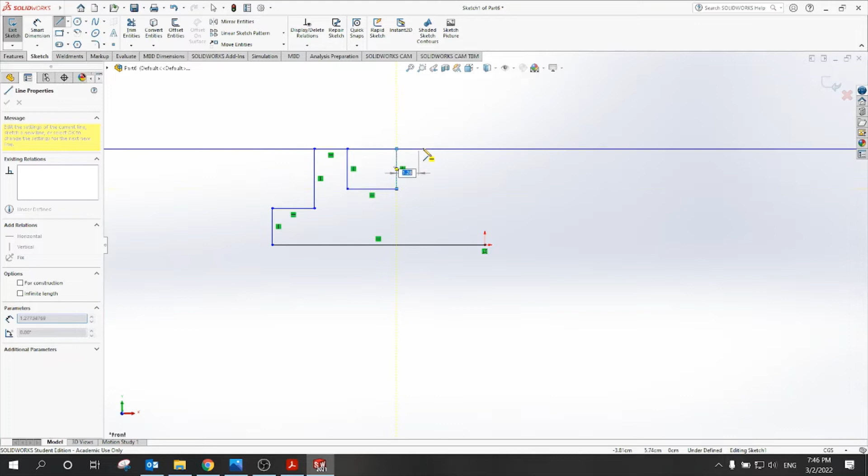a new sketch, front plane, and straight line from this corner to the end, and then small line, and then that 25, and then the height, and something like this, and then I go down, and then the random frame, and then I'll stop at the origin.

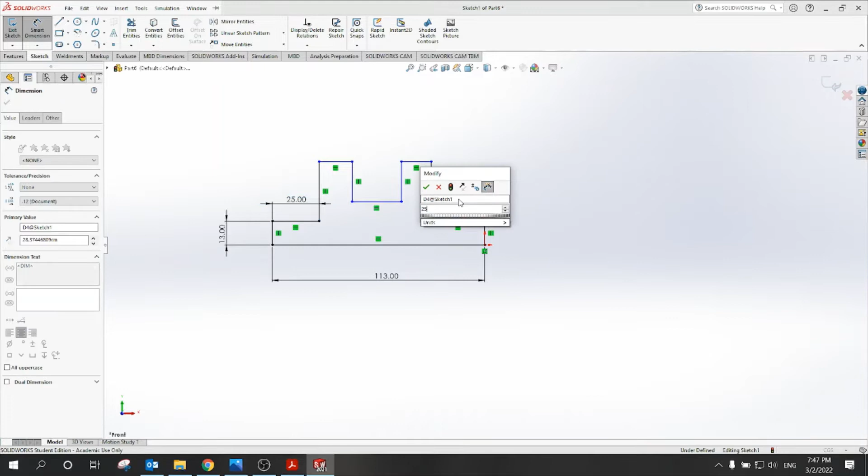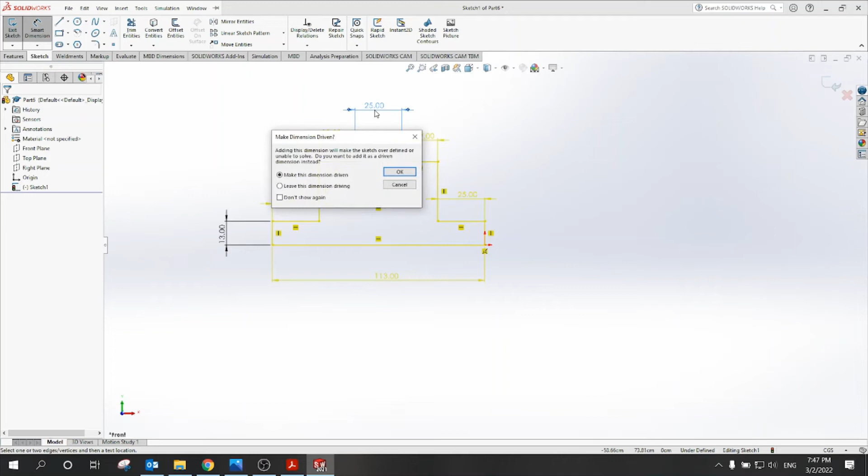When it comes to dimensions, I have to put this line as 113 and this height as 13, and this is 25, that's also 25, and this is 19, and this is also 19. The gap in between is 25. So it's given. Why? Because 113 minus 25, 25, 19, 19, so automatically it's 25.

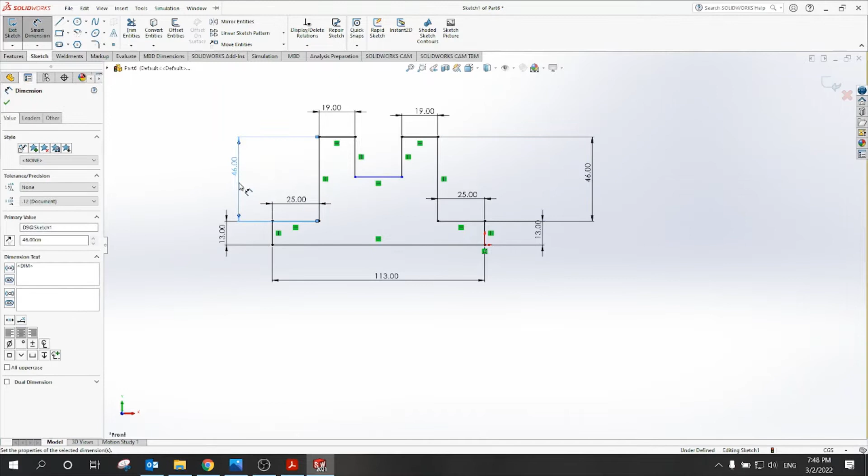Now this height is 13, and also the other height to the right is 13. And we said that the total length now is 46 to the center of the circle. So this is also 46. Now I finally need to define this height, which is the thickness 13, and I have this box, height is 17, and it's 35, starting from 39 from right.

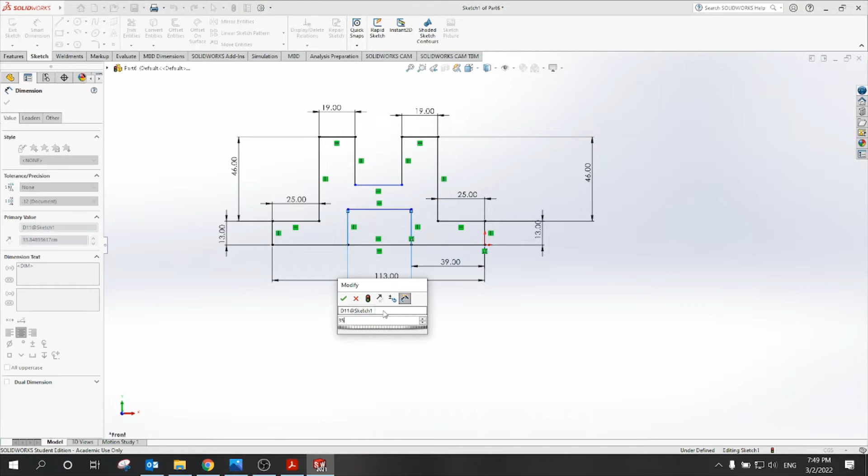So that box is somewhere in here, it has a distance from this line to the right edge 39, and the width is 35 and height is 17. So this is 35 and this is 17. Now the height of this line is given to be 13. Enter. So this is the final sketch, fully defined.

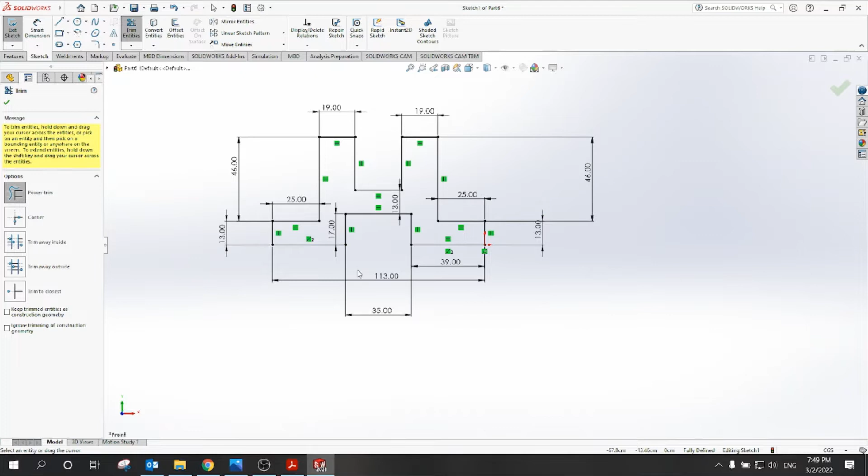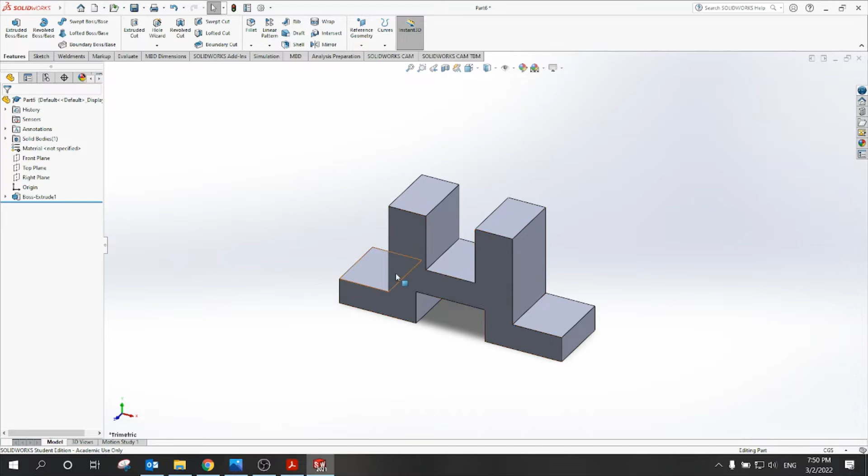I just need to trim this line. And that's it. So if I finish the sketch and extrude a distance of 32, I'll get this shape. This is my view. Now I only need to add the details of the circles, for example, and the chamfer and the small circles. If I start with the small circles on this top surface, so I have a circle, this distance is 13, and this distance is also 13, and the diameter of the circle is 11.

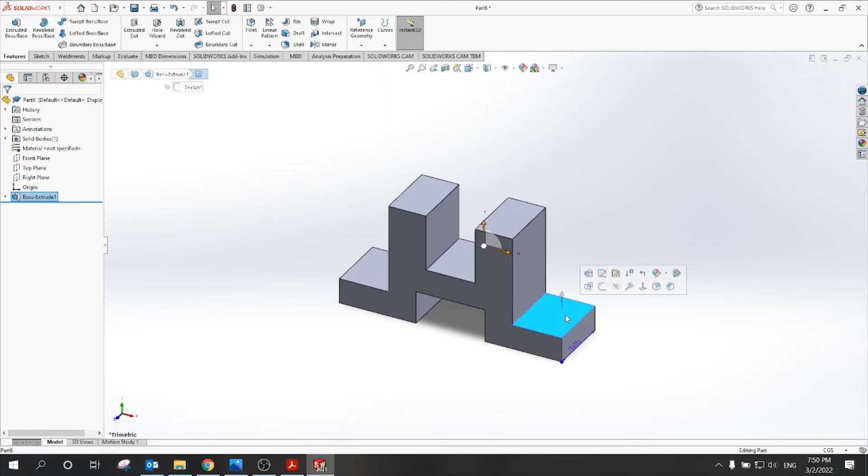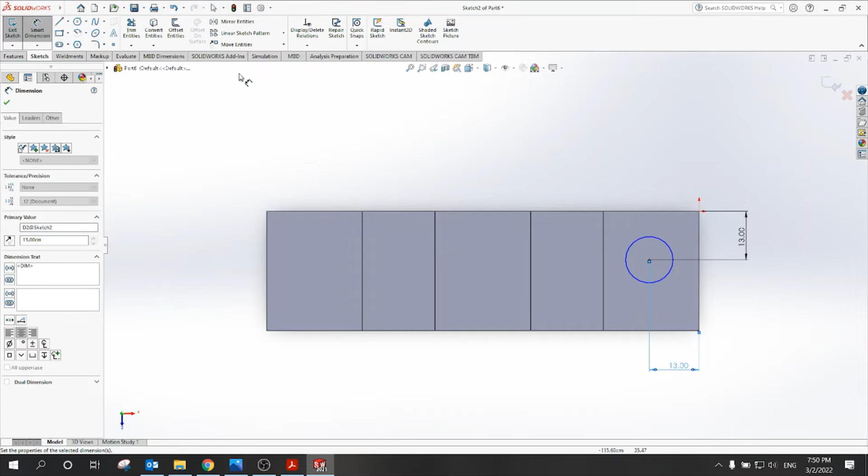So this is the top view, normal to, and I'll create a sketch, and I have a circle. It says distance from this line to the circle is 13, and from this center to this line is also 13 with a diameter of 11. And I have another circle in the other direction. The diameter of the circle is 11, and the distance from this line is 13, and distance from this line is also 13.

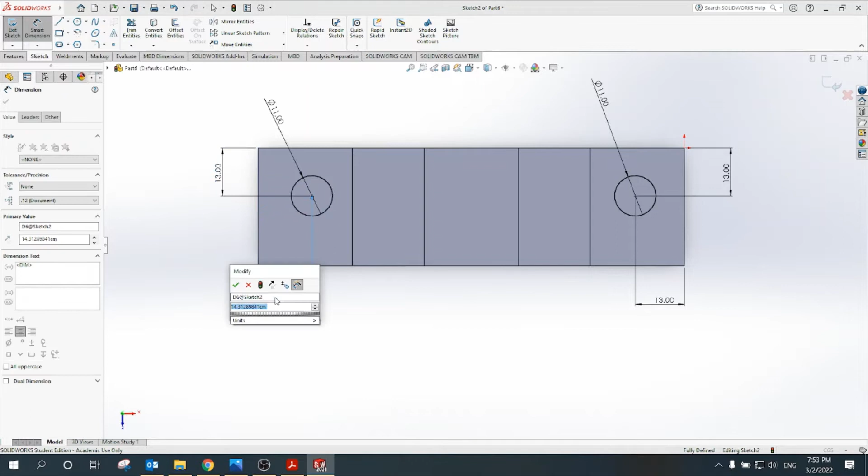Now if I confirm the sketch, I extrude cut circle 1 and also circle 2, then I'll get this shape.

In this tutorial we want to practice something new, so I want to cut this chamfer without drawing a rectangle and extrude cut. The ordinary way is to go to this plane and make a sketch, make a triangle, and then cut out.

Today we'll just go to the tool named 3D fillet or 3D chamfer, same as fillet or chamfer in 2D but in 3D. So when I select, I have all the options to cut: two distances, similar distances, angle and distance, inclined distance, and so on.

So I'm saying that I'll give you a distance and angle. This is my option, because I have angle 45 and distance 10. Or this is also 10 and 10, because with the same angle 45, its distance is 10 and 10. So I'll use angle 45 and distance 10.

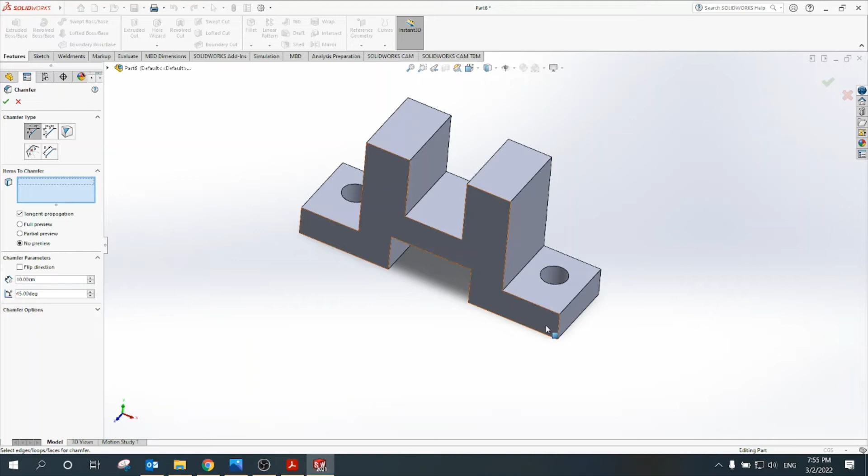So when I say this, I will decide the distance to be 10 and the angle to be 45 as given. Then when I select the items, I'll say this edge and this edge, so two edges, and then I will confirm. That's it. This is very easy compared to creating a rectangle as a sketch and then extrude cut.

Now finally, I want to add the curve on top and the two circles. I can make them in one sketch and then extrude. Or not, because I can add this plate as a solid object, extrude, and then I can remove the circles out. So let's start with creating this curve.

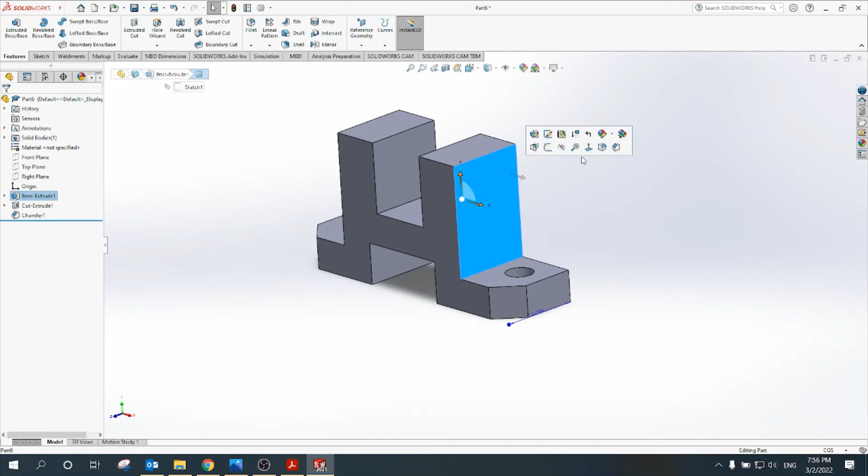The condition again is the total height is 64 and the curve radius is 35. So if I come to this plane, which is my right plane, I will create a center line only, to decide the total distance between this center line and this bottom line to be 64.

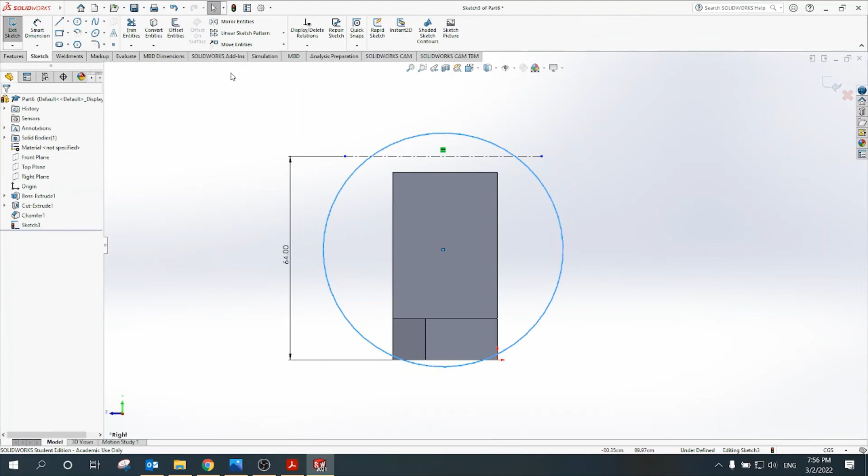Now, I know that I will have a circle. It's in the center, but I'm not sure of its location, so this is my random circle. And I know that the circle has a radius of 35, that means diameter 70. Now, this is the 35 radius, and this is the total height of the shape.

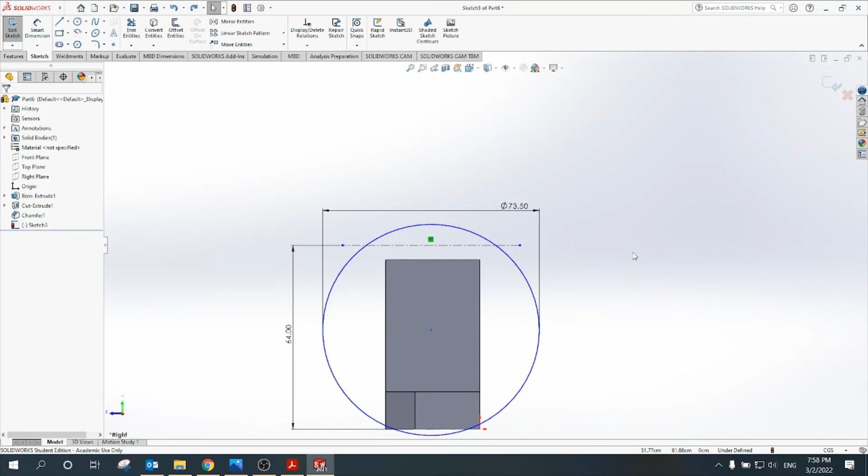What I also know is that this circle will stop when it meets the two lines of the object. Now, this circle has to be tangent to the center line. That means the center of this circle is not random, so it should go down until it touches the line. So I can do that by saying the circle and this line are tangent.

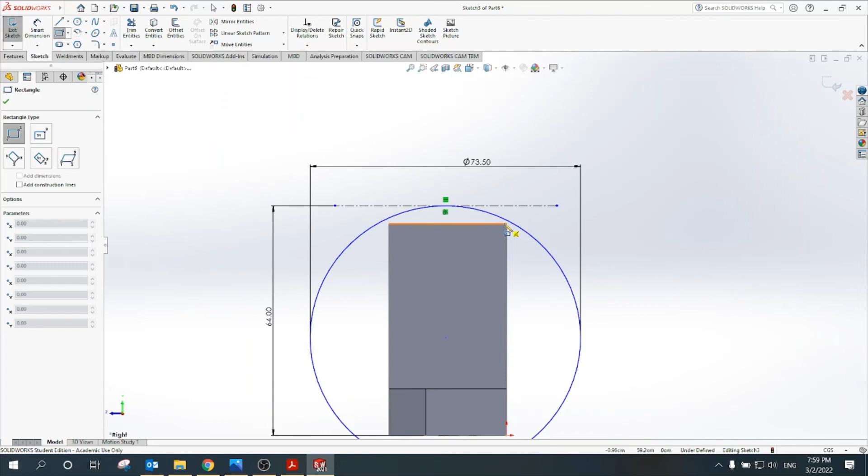So in this case, I'm constrained with the tangency, and I'm constrained with the diameter and the height of the line. Finally, I have to edit this box, and I have to make sure that the width of the box is 32, similar to the rest of the shape.

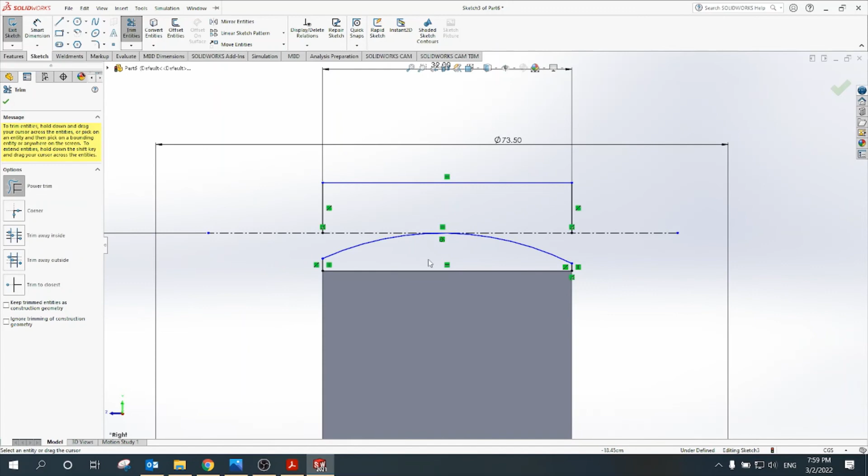Now, if I trim the lines and the circle, this is the final thing that I have to create. That's it, so I don't need these lines, I only need this closed area, and I will confirm the sketch and extrude this object.

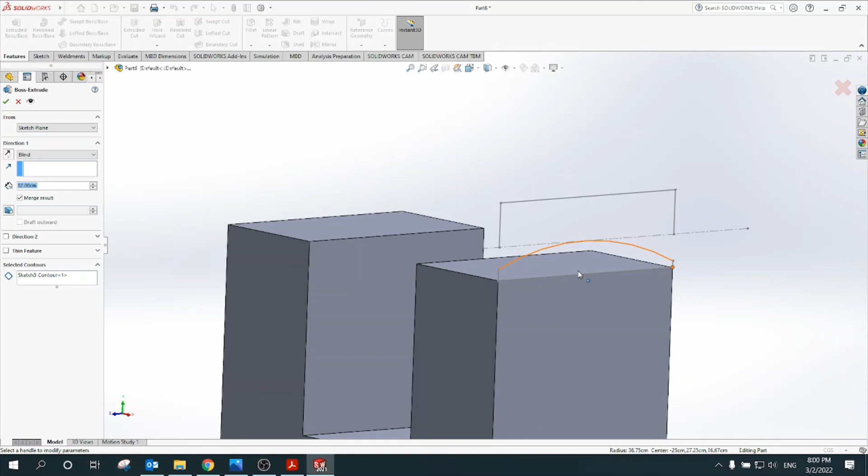Not to this direction, to the other direction, and instead of extruding into one part, I will increase it to the total shape, and then it's easy for me to cut from this direction, create a rectangle, and then cut.

So I need to know the distance between the two lines, which is 19, 25, and 19. So this extrude should be 19 plus 19 plus 25. And that's it.

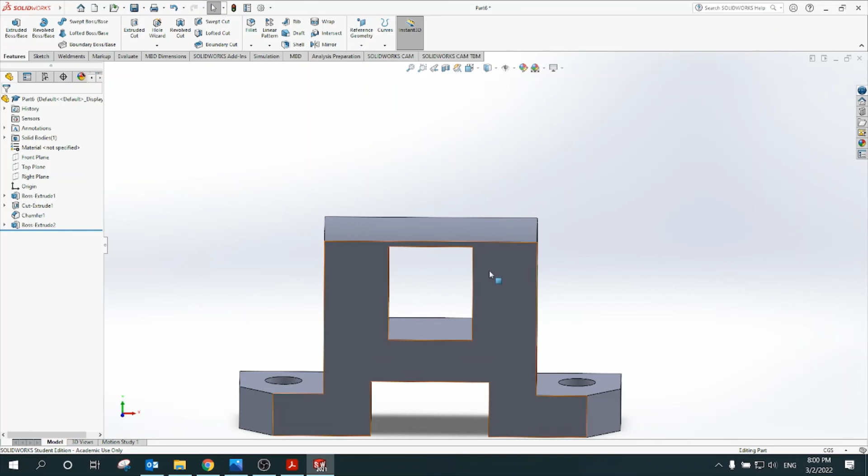So now it's easy for me to remove this shape. I'll start from this corner, and the width of this rectangle is 25, and that's it. So I can cut out this.

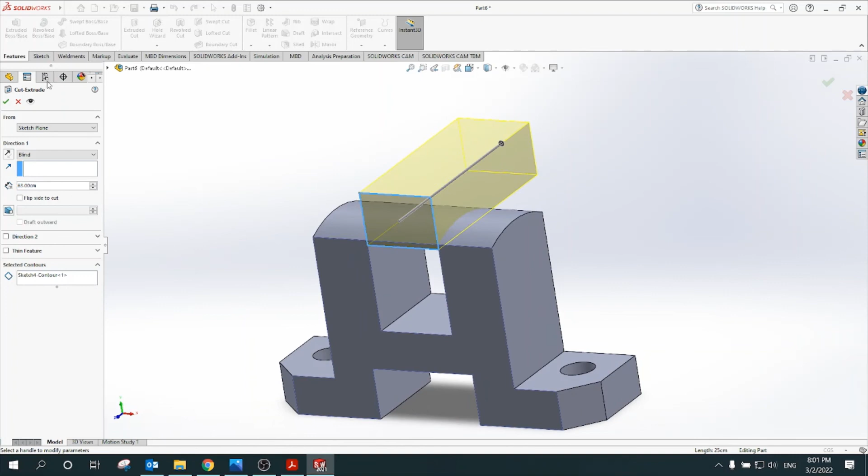So someone would say that it's easy to create the sketch on one side and extrude to this point and then do it again to the other side. It's up to them.

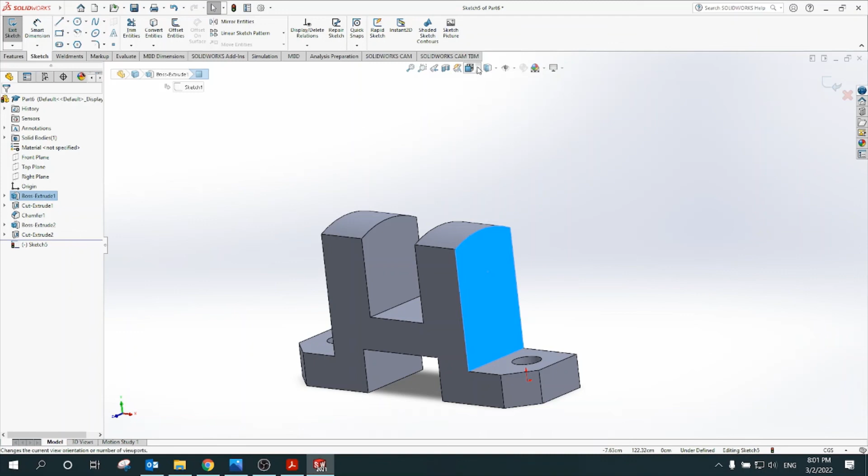Now finally, I would create a circle in the right view, and I know that this circle is in the center, so the distance between the line and circle is 16, and the height of the circle is given to be 46, and the diameter of the circle is 13.

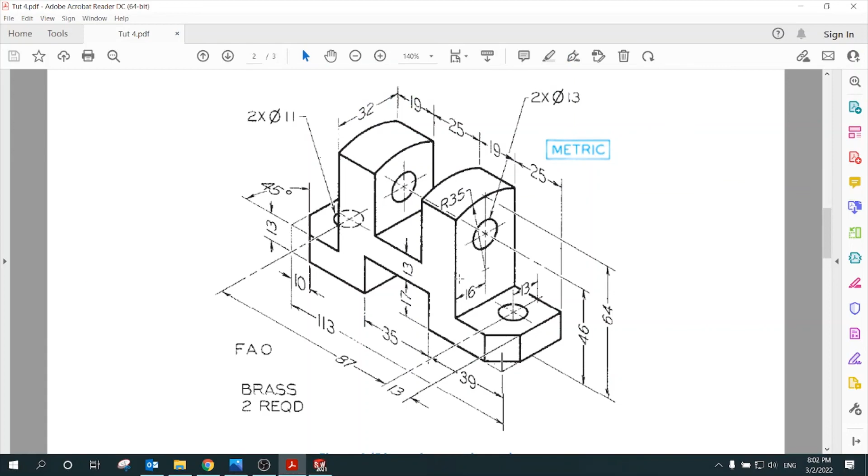So this is 13. And finally I can cut out the circle, so extrude cut the circle through all, and that's it.

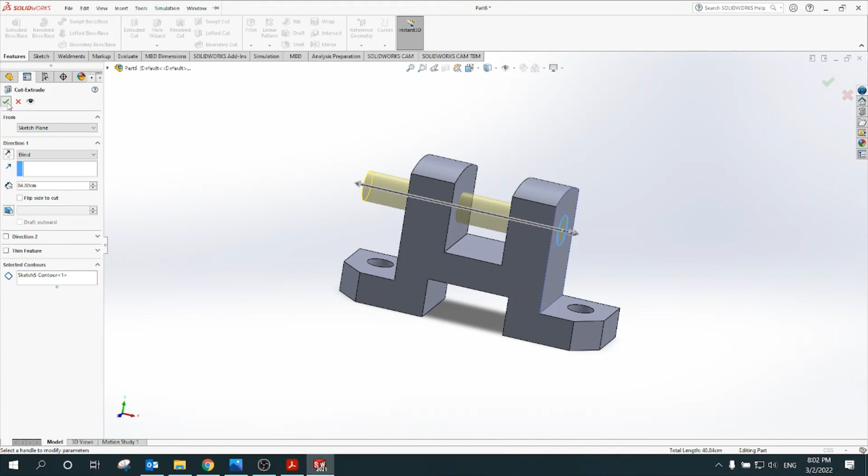So this is our final drawing, it's the final shape, and that's it.